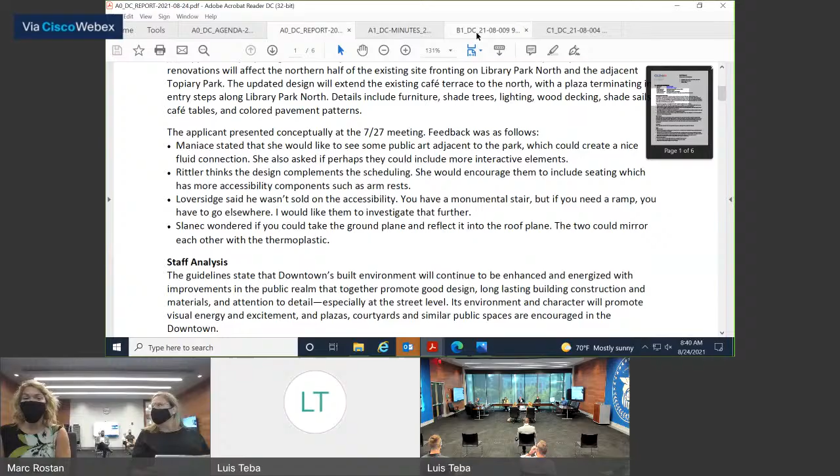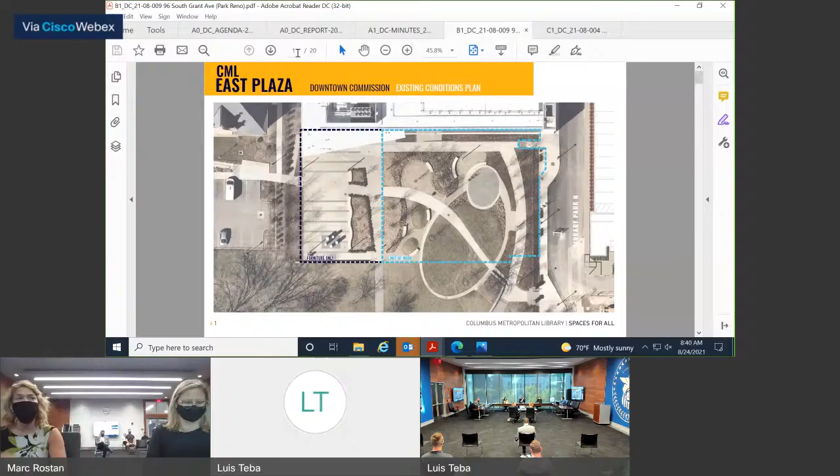Sure, certainly. So I don't think there's a significant difference to what we presented before. We did take a look at the feedback that we heard in the meeting and certainly tried to incorporate some of it, particularly around accessibility for children's elements and connection to the park. We've moved those a little bit closer to the edge of our space and into the park.

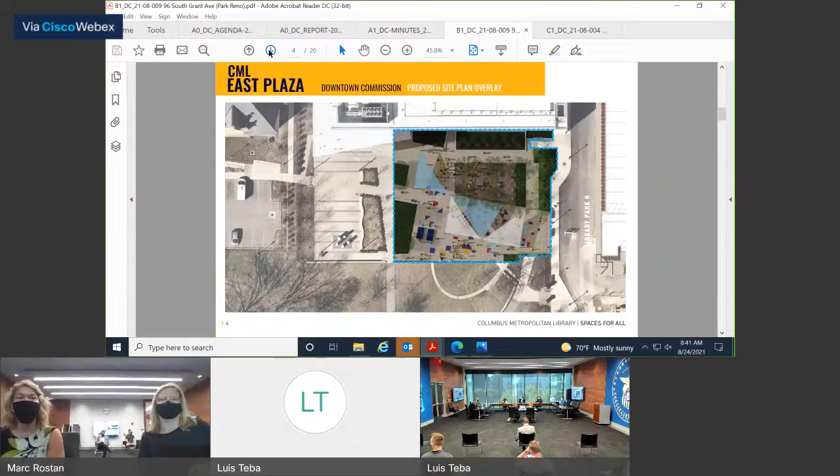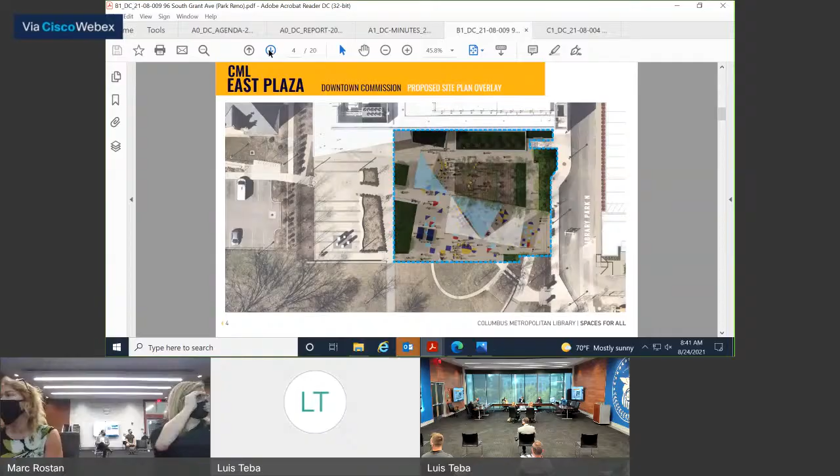We have finalized a little bit more what we anticipate to be the pattern and color pattern on the main plaza area, working with our team and the MKSK team to do that. We've continued to have conversations and really refined the color palette and some things along that line, and some of the positioning of the elements.

We did take a look at the feedback around accessibility, and we took another look at that, or two or three. We feel that the challenge for us around adding further ADA accessibility is really around the location of the trees and how we would be able to manage that, so we feel that is a very difficult thing for us to add.

It's in order to have the entry on the right, on the north entry as you're looking south, page right, by the stairs. On the east side of our site, we have less grade change than on the west side near the library. There's already a lot of settling issues along there because of the existing pump system involved, so in the basement we don't want to add more hardscape to the west side, but also it's like five stairs there.

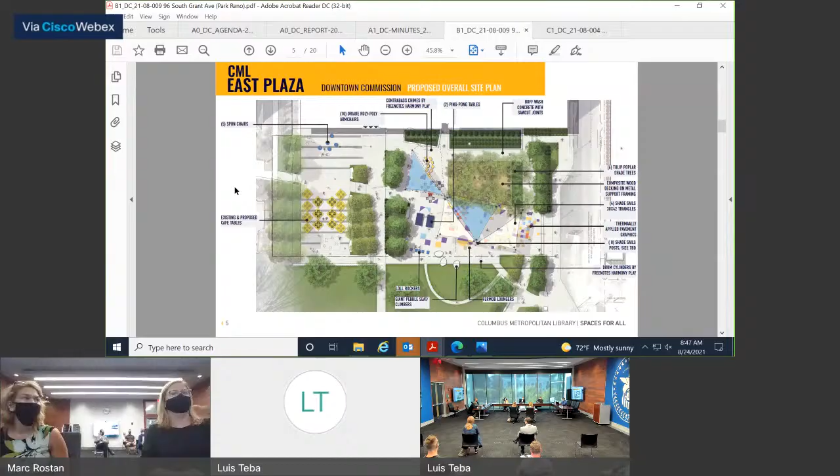The nice thing about it, though, is that we are looking at some various lighting opportunities and options below it, so that will be something that could also change, which I think will be unique to the space. When the shade sails come down, the posts will remain, and that lighting would also then be directed in a different way so that it's more ornamental and not shining at nothing.

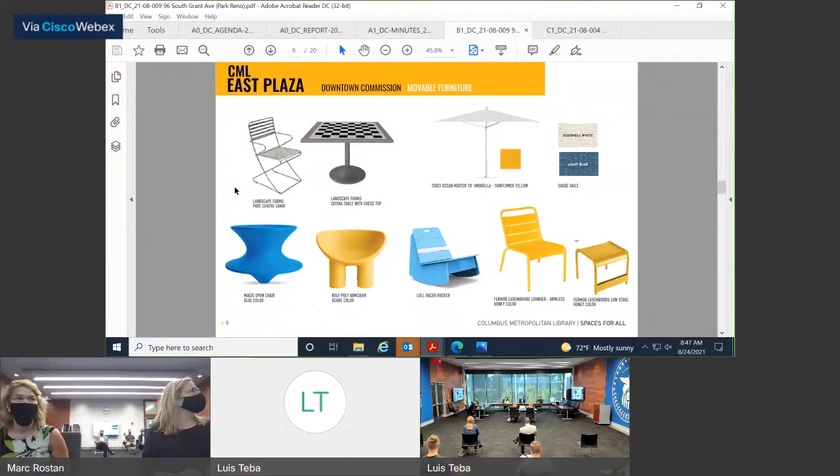That's right, yeah. Any other questions for the applicant?

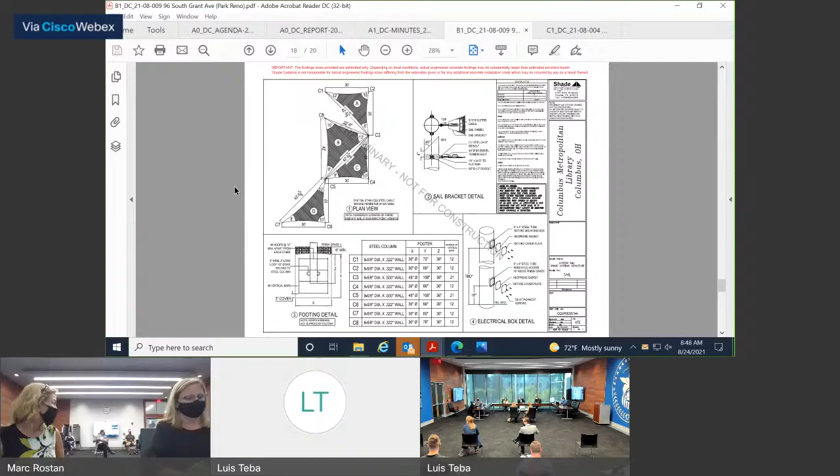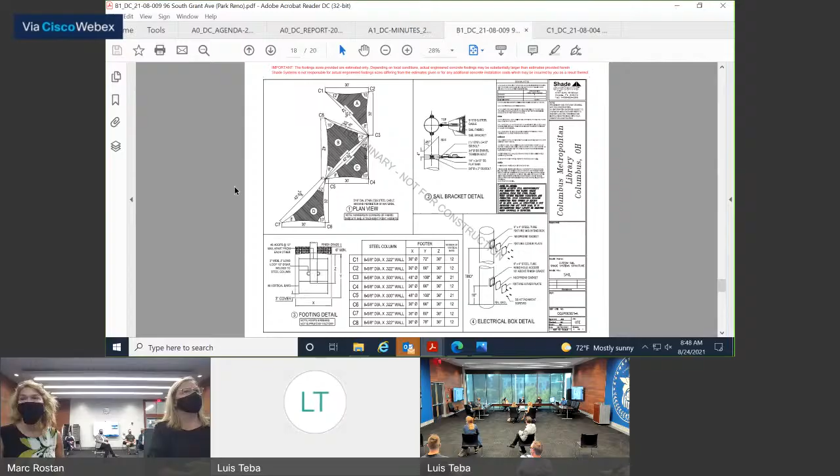The parking - I'm just two doors down, we've been down there for third generation, been down there for 75 years. There's a couple of concerns I have. One is the parking; from the schematic I saw, there are approximately 45 parking spaces, would that be correct? I think that's a different project. We're talking about the library, not the parking on each side. Okay, you're going to talk about one of the others - let's maybe hold that for later. Are there any other comments?

You guys don't have to talk about that. Oh no, I was gonna say, you're not doing anything with parking. We have a drop off. I'm not hearing any other comments.

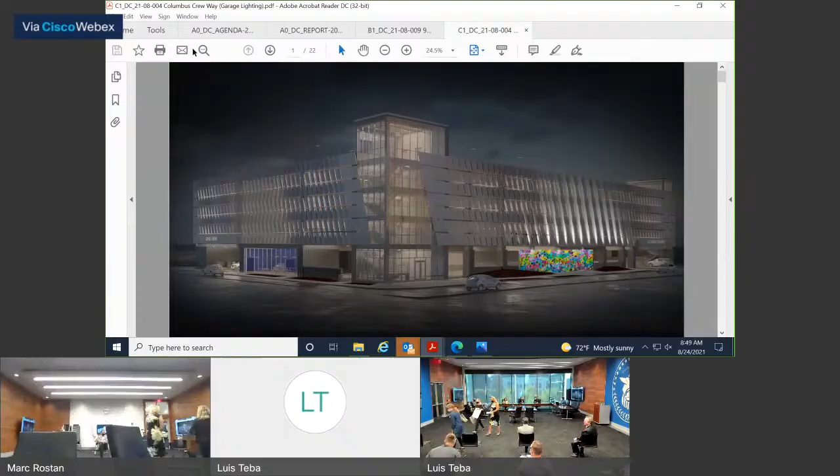Condition with exterior lighting package from Astor Park parking garage. It was approved at the May downtown commission with a condition that they return with lighting. The proposal calls for 20 upward facing arm-mounted luminaries along the east elevation to illuminate the architectural perforated fins. The mural will be illuminated by 9 downward facing arm-mounted luminaries. The Columbus Crew Way entrance sign and Cahill Drive entrance sign will be illuminated by slim profile LED luminaires. The rooftop parking will be illuminated by pole lighting.

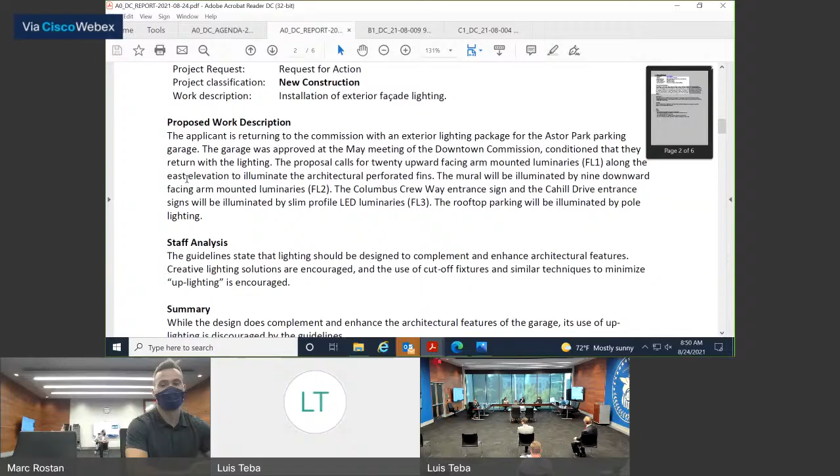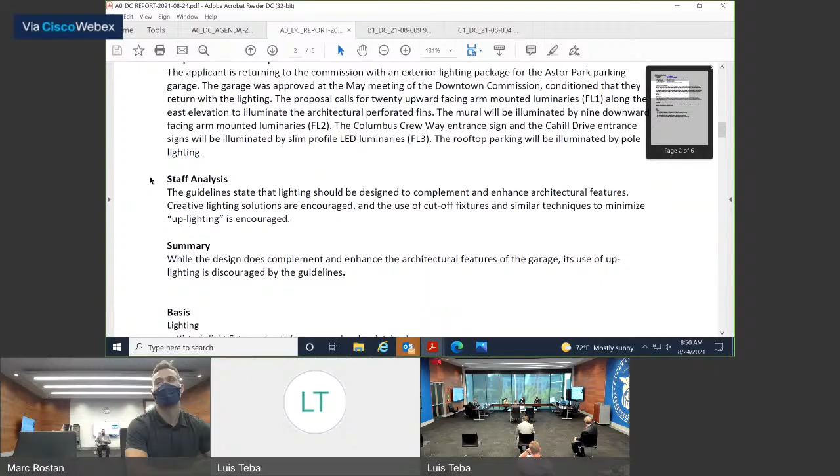The guidelines state that lighting should be designed to complement and enhance architectural features. Creative lighting solutions are encouraged, and the use of cutoff fixtures and similar techniques to minimize uplighting is encouraged. So in summary, while the design does complement and enhance the architectural features of the garage, its use of uplighting is discouraged by the guidelines.

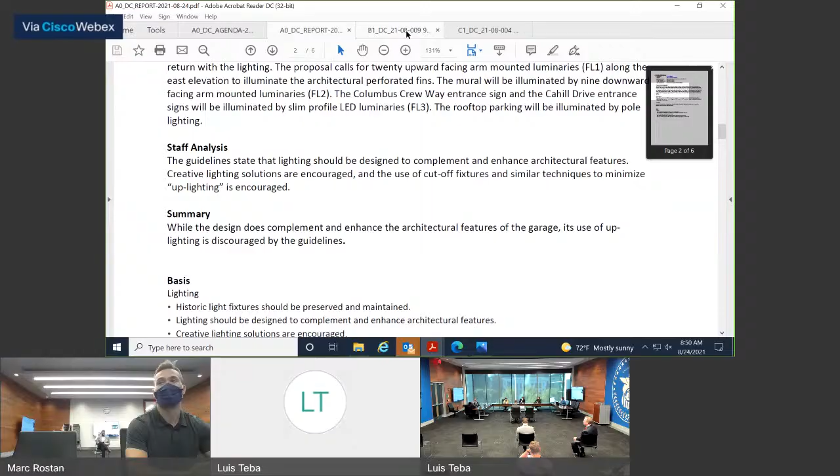Let's see, I'm sorry, were you sworn in? Yes. Would you identify yourself? Zach McClurg, the project architect with Moody Nolan. Zachary McClurg with Moody Nolan, the project architect.

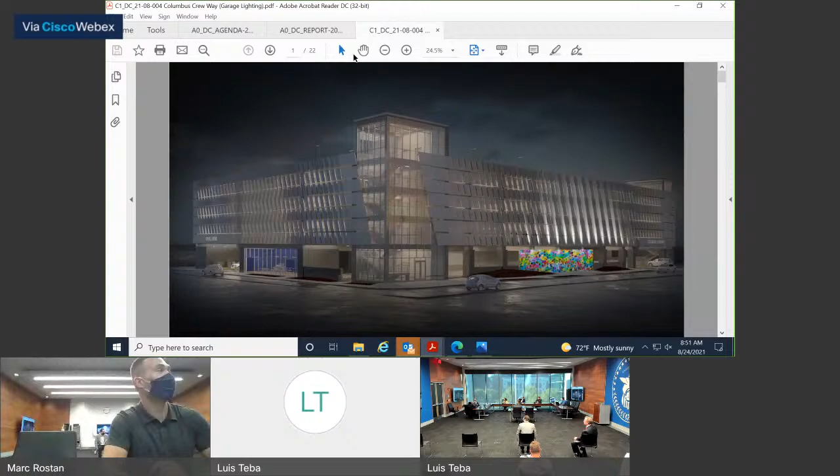Okay, do you want to show us what you're thinking about here? Sure. So we did engage a lighting designer, and one thing we kept in mind was the distance of the throw of the light. We plan on that light being at its weakest towards the top of the wall, the top of the 5th floor. We don't anticipate any light pollution beyond the facade itself. It's mostly there to highlight the perforated metal panels.

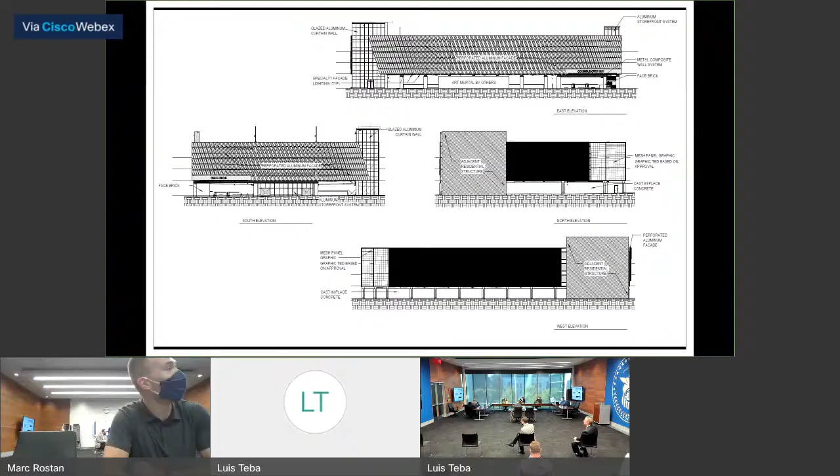Those lights, kind of pictured it, so they're fine. Correct, yeah, they're angled towards the building and up. They should follow up along our metal fins that we have there. Are they mounted on the bottom of the metal fins or on the ground? They're mounted on their own attachment arms along the 2nd floor of the parking deck. I'm not sure if that's shown very well in any of these. Looks like you can maybe see it - just over the metal panel, so it doesn't start down on the ground. Correct, yeah.

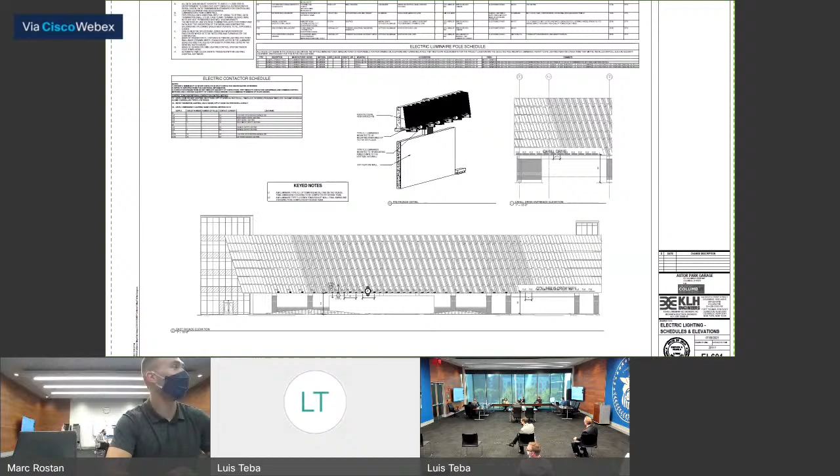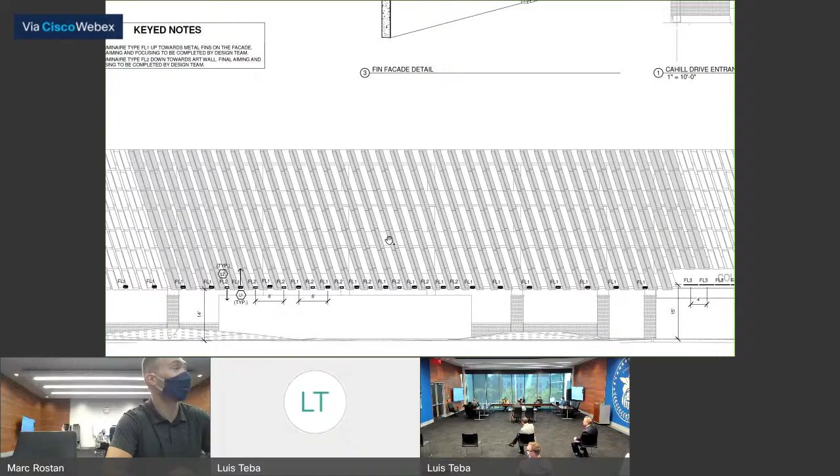Correct, it's the same. Yes, correct, it's the same assembly. It comes off its own rigger arm that's angled down towards the mural itself. Yes.

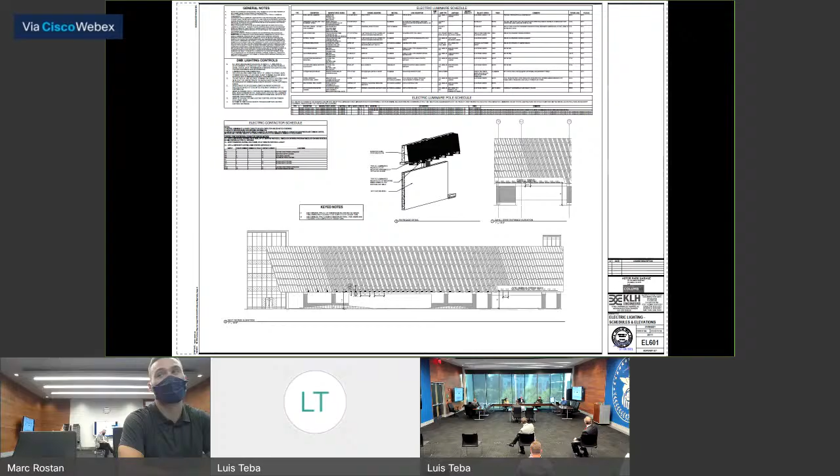Let's just, tell me, what's our objection to the uplighting, so they shoot way up there? As opposed to something that was directed at the wall. You mean, trying to advocate if it's lighting? Sure, yeah, I mean, I wasn't around when the guidelines were created, so I don't know what the exact intention was, but my guess would be light pollution. Yeah, sky glow, we got it all outside.

Is it supposed to be bright, or is it kind of something subtle? It's probably not going to be too bright, honestly. We didn't want to compete with the stadium across the street, especially working with Pizzuti and Haslam. I'm sorry, are they color changing? No, they're not, they're white the whole time. I frankly like that.

For a second, okay. So again, to rehash this, the building has been approved, they were asked to come back for lighting, so we're simply addressing lighting. Any questions or comments on this, anything else, anything from the audience?

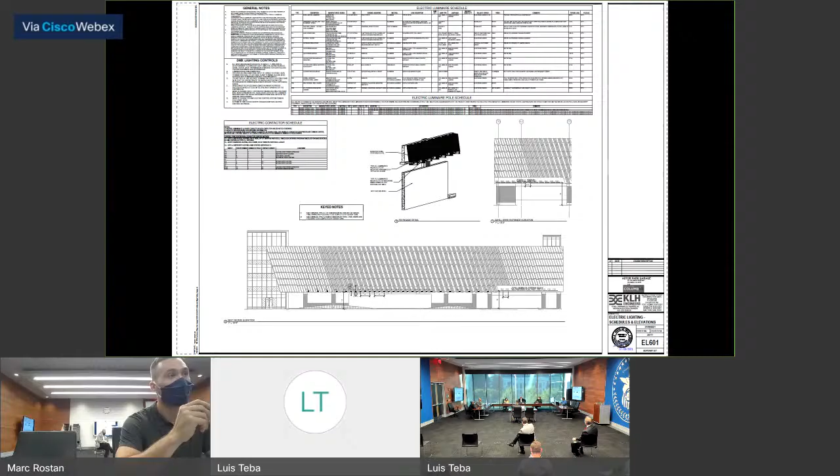Yes, go ahead, Jan. So other than what you're doing on the east facade, is there anything down for the other facades? There's nothing else directly illuminating the facade on any faces other than the one you see along Columbus Crew Way.

Okay, and just a real quick question, is the lighting on the mural, the art component, new today, or was that part of the original? No, that's also being asked for approval, but that was not part of the original.

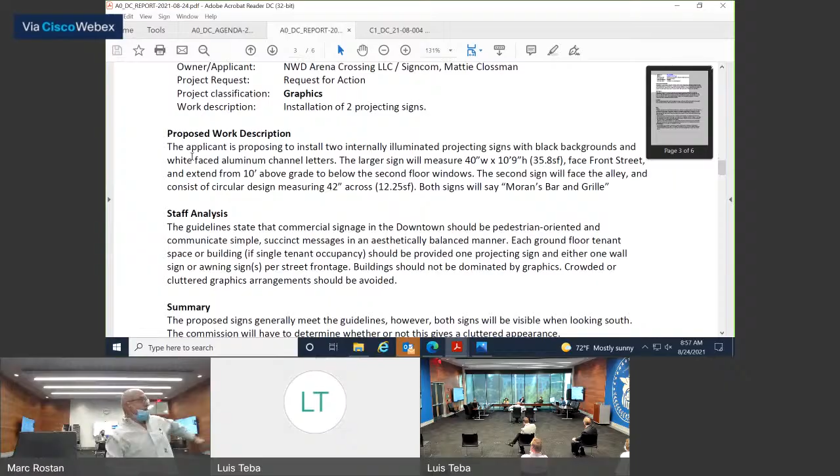Guidelines say that commercial signage should be pedestrian oriented and communicate simple, succinct messages in an aesthetically balanced manner. Each ground floor tenant space should be provided one projecting sign or one wall sign, and either one wall sign or awning per street frontage. Building should not be dominated by graphics, and crowded and cluttered graphic arrangements.

Summary, proposed signs generally meet the guidelines. However, both signs will be visible when looking south. Commission will have to determine whether or not this gives a cluttered appearance.

You mean when looking north? Looking south, when you're looking south from the north, you'll see right here, this.

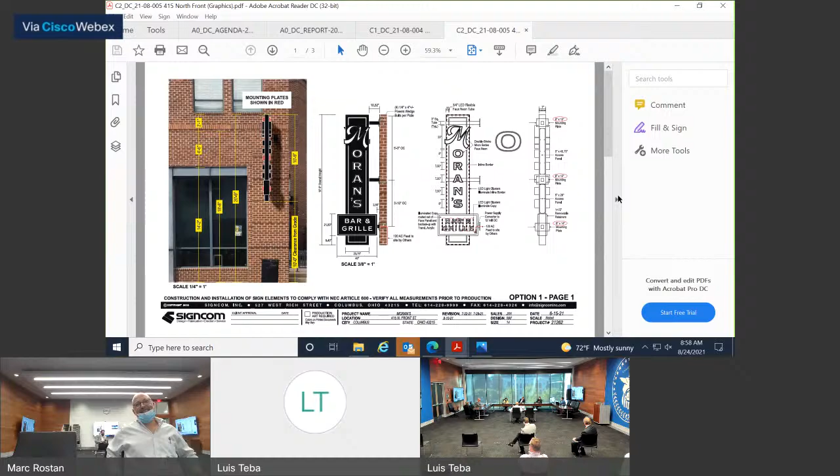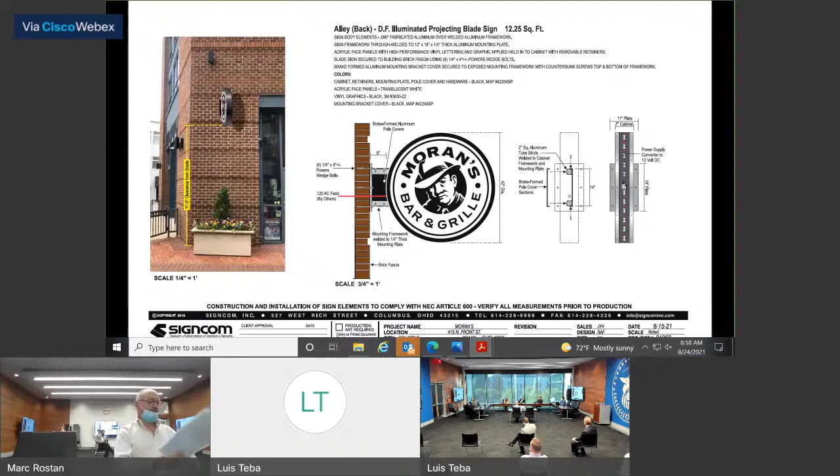I'm sorry, we have the applicant here. Would you identify yourself? Bruce Sommerfeld, thank you. Bruce? Okay. Were you sworn in? Yes, did you have any comment?

No, it's a visually challenged approach from the south. We're heading to the south and certainly one is more pedestrian oriented than the other for vehicular traffic, but we appreciate your awareness and appreciate the move forward.

No, it's not neon, that red just identifies the LEDs on the inside of the cabinet. It's all black and white. Oh, what's from the very outside? Oh, those just show the brackets, the studs or the plates, side going left to the right.

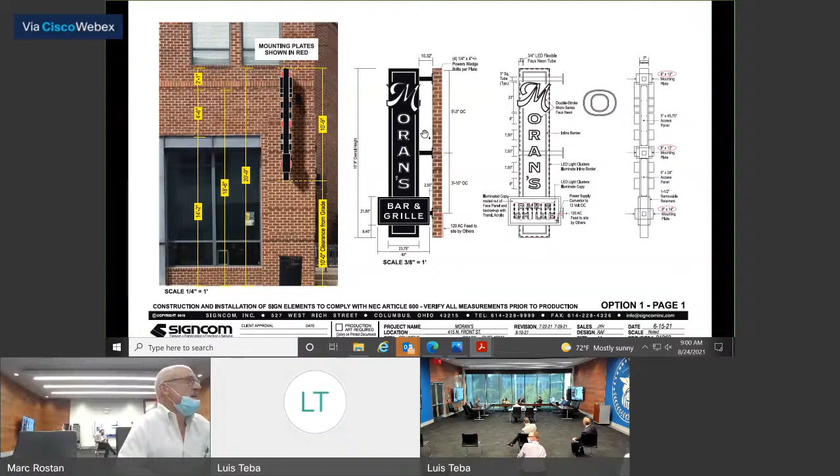Motion to approve, is there a second? Questions, anything from the audience? Those in favor say aye. Aye. Those opposed? Motion carries. Thanks, Bruce. Thank you. Good to see you. Good to see you.

Our conceptual review, by Neilston. Here we are, 225 Neilston.

So here's the building, looking south, this is the east side of the building. This is like an alley, it's not a city-owned alley, it's just like an access road, owned by the property owners, I believe, they want to turn into kind of like an outdoor patio space.

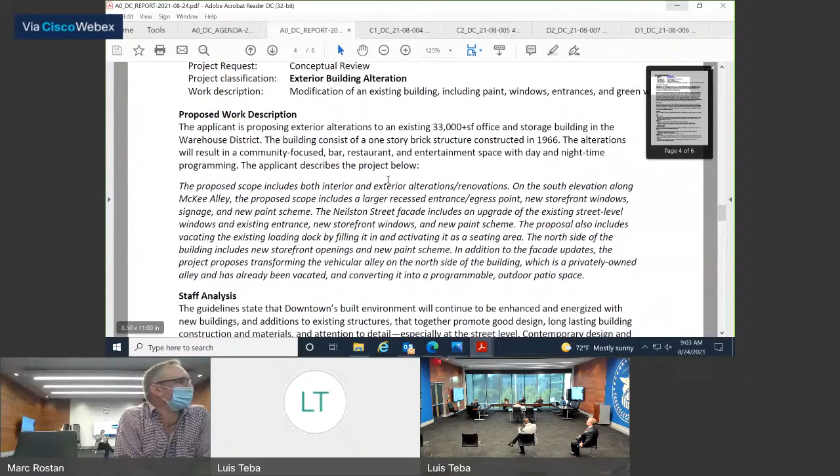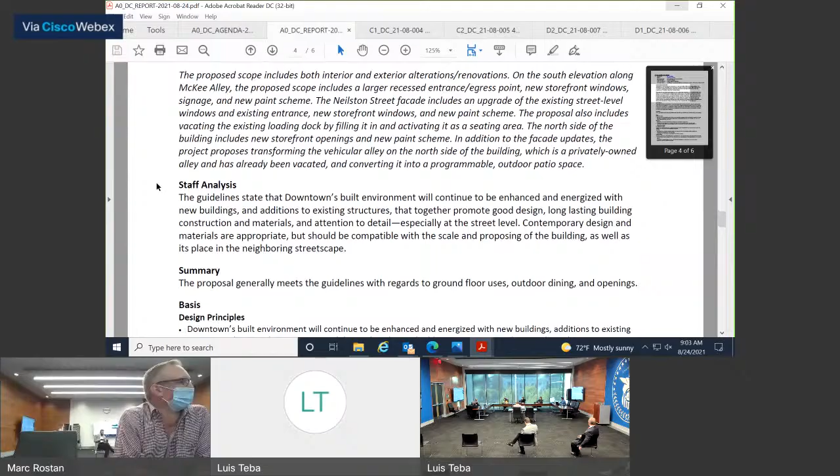So our analysis is that the built environment will continue to be enhanced and energized with new buildings, and additions to existing structures that promote good design, long-lasting construction materials, and attention to detail, especially at the street level. Contemporary design and materials are appropriate, which should be compatible with the scale and proportion of the building, as well as its place in the neighboring streetscape. Summary, the proposal generally meets the guidelines with regards to ground floor use.

You identify yourself? I'm Brad Parrish with Archall Architects. Thank you for hearing me this morning.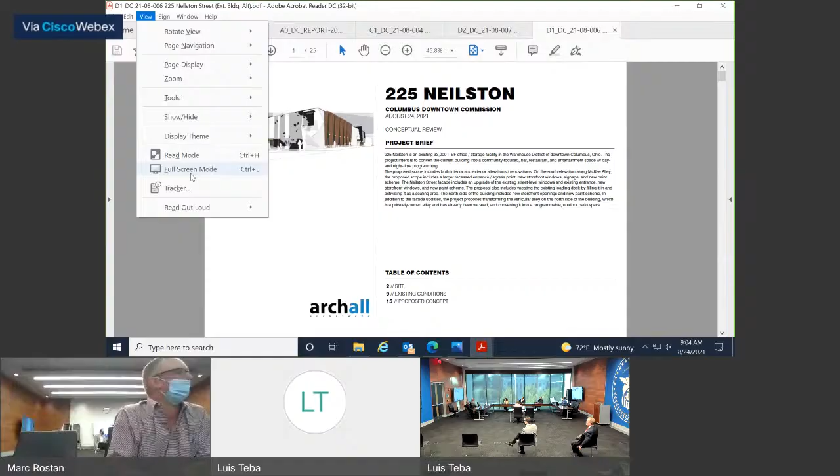This project is, the existing building is 33,000 square feet. It's the old vital statistics building in this area, so it just holds a bunch of the birth and death records of individuals in Franklin County. So they're moving out. My clients, Adam Nestler and Noah Morgenstern, who are from Buffalo and Boston, and they've had a couple concepts for this community-based bar and restaurant and entertainment space, and so they want to bring that to Columbus.

From the design on the exterior of the building, when we first started looking at this, the existing building's a brick box, surrounded by really articulate warehouse type brick buildings with great brick detailing. So we felt that the existing brick is not a really great brick, it's kind of an orangey color on the outside. So we felt that if we would paint the existing building to set it off amongst the really great brick detail warehouse buildings in this area.

But also kind of, from a design standpoint along Neilston here, is give sort of these big long frames that start to play off some of the existing storefront openings, reuse the existing entrance there, and give it some height that signals it's sort of coming into an entertainment space. We're adding an additional entrance space off of a key alley here as well. The signage element on the corner, we're still developing.

And I would say hold off on comments today on that as we'll bring that back to you. But it's some sort of amorphic shape on the corner of the building here, along with the brand signage, which they're still sort of gathering.

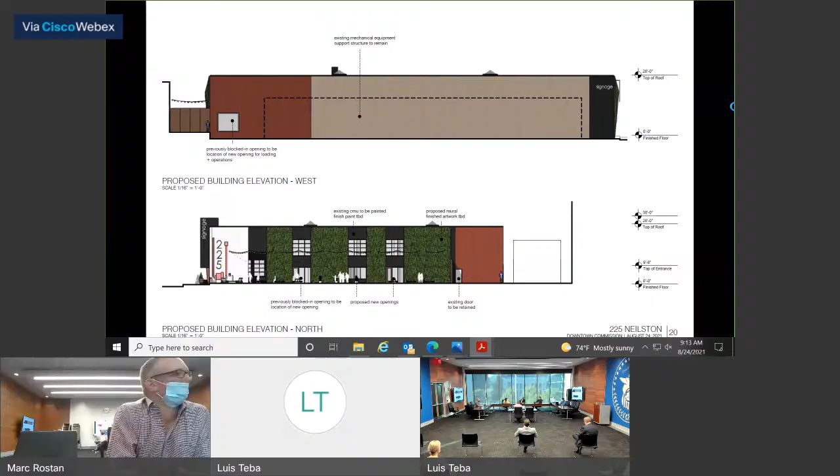How wide is the alley along the south side? I mean, yeah, we're right on the property line with that alley. There is an entry, but it's recessed into the building — we're carving like a 10 by 10 space into the building so you're not swinging out into the right of way.

Yeah, you're exactly right. I appreciate what Bob said, and I agree with what Bob said, but it's sort of a prioritization on the public side of your building. I love some of the things you're trying to do — that red brick character, but still creating these punches of things along there. I love the alley, I think it's a great opportunity. The whole district needs energy, so yeah, I think it's a cool use.

I'd say the Neilston Street elevation has an organization too, and the north and south sides don't have consistency with those. So I don't want to put a lot of effort into the south side if the site is going to block whatever's going to happen there. I just want to be mindful of that moving forward.

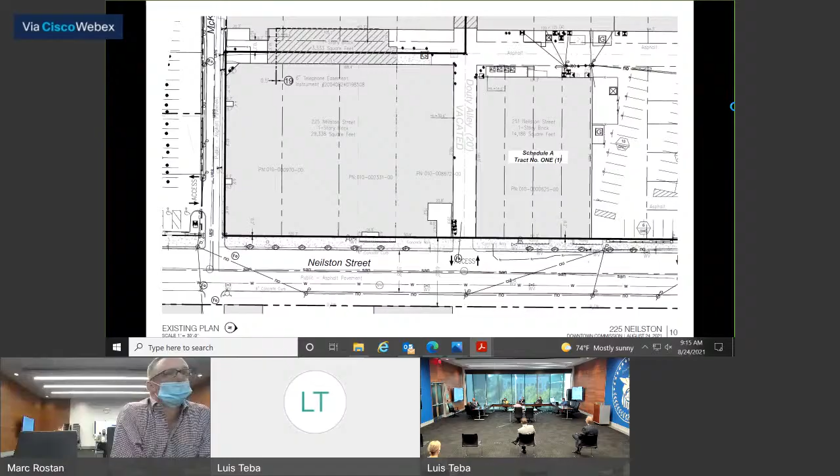Yeah, so there's a grade change from inside and out.

From our concept, it's something compressive, and then you open up to a two-story space too — it's kind of this nightclub feeling where you come into a small door and then open up to the larger space. And then we have the large windows there to the right of that.

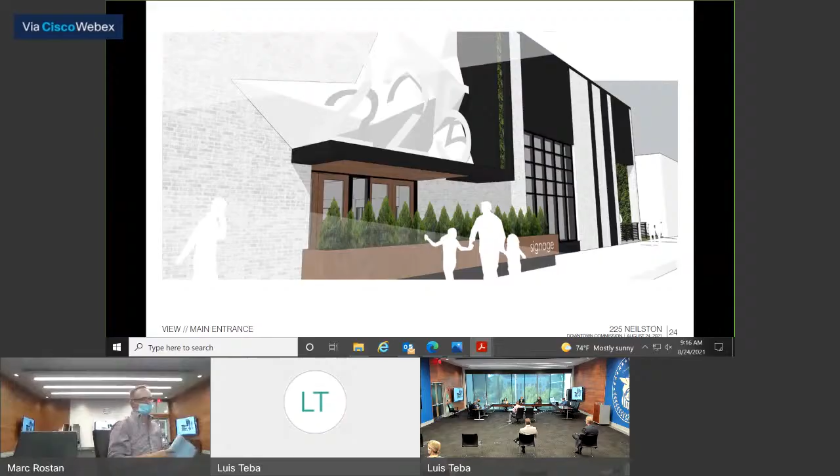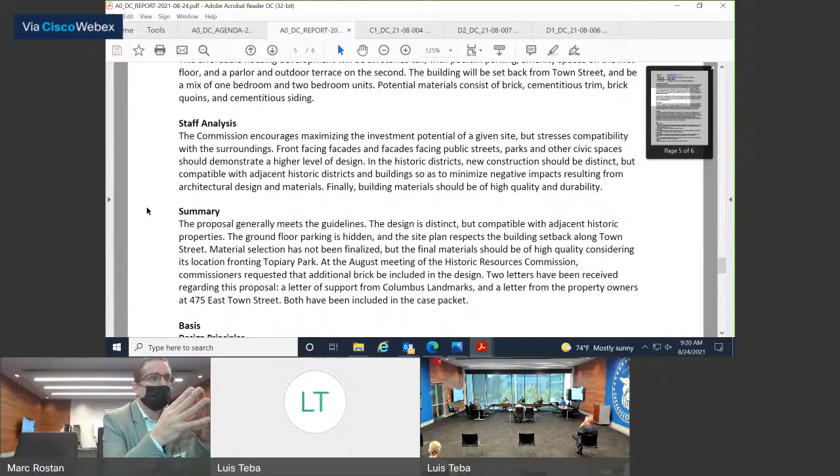In our analysis, the commission encourages maximizing the investment potential of a given site, but stresses compatibility with the surroundings. Front-facing facades and facades facing public streets, parks, and other civic spaces should demonstrate a higher level of design. In historic districts, new construction should be distinct but compatible with historic buildings, so as not to cause negative impacts resulting from architectural design and material. Finally, building materials should be of high quality.

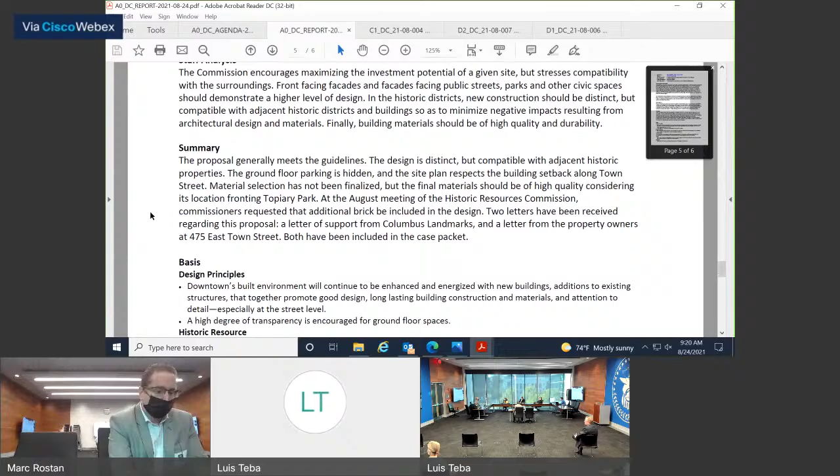Summary: the proposal generally meets the guidelines. The design is distinct but compatible with the property. Ground floor parking is hidden, and the site plan respects the setback along the front. Material selection has not been finalized; final materials should be of high quality considering its location.

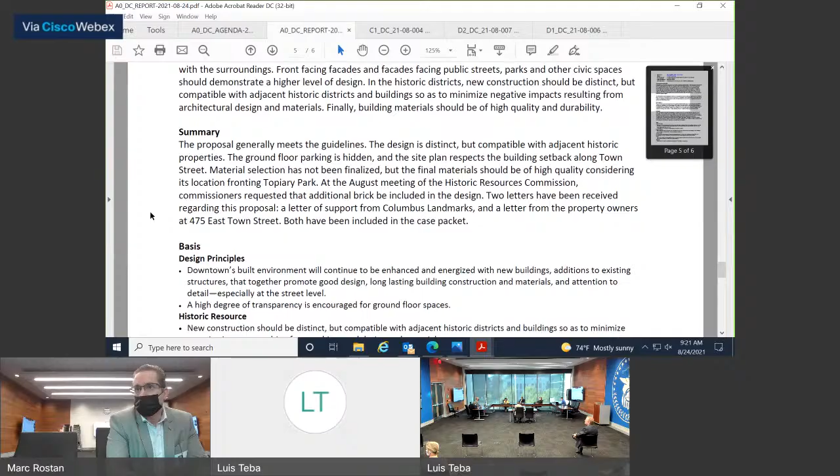At the August meeting of the Historic Resources Commission, additional brick was to be included in the design. At the last meeting, they didn't stress that as much, but they did ask about the south facade and parking.

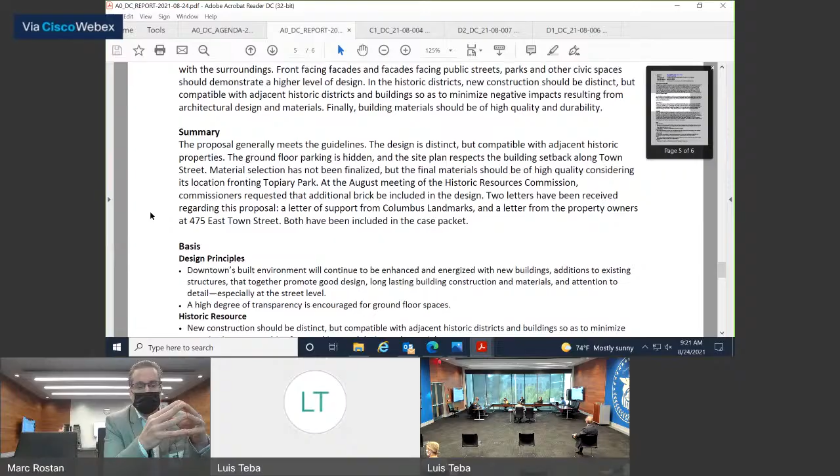Two letters have been received regarding this proposal: a letter of support from Columbus Landmarks, and a letter from the property owners at 475 East Town Street. Both were included.

David, did you have a presentation? Not specifically, I think. If anything, from the packet that you received, we were looking at the siding colors. There was a concern that it looked yellow, and it did look yellow. We're not intending the siding to be yellow—it's going to be a taupe color, more to match a brick tone.

David, would you identify yourself? Yes, excuse me. David Maleka, Moody Nolan Architects.

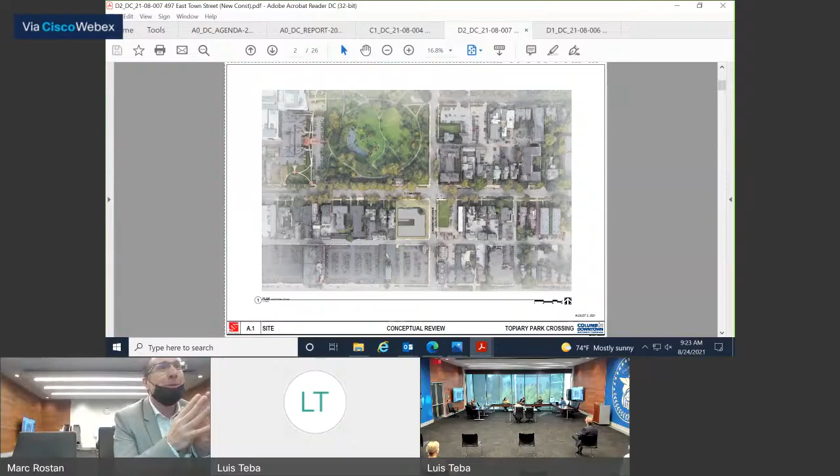So what is the material? The material above will be siding—there's actually going to be two types. The middle portion of the building will be one, and the upper portion another. We're looking at some sort of scalloped or shaped cementitious product that does that, but the problem is they're not shipping to the north for some reason. They would manufacture it down south, but it's a work in progress right now, so we'll have that selected for the next meeting.

Yeah. This one that's...

In the neighborhood, we did a lot of work up and down the street. There was probably a public presentation put out early on for this site that we went and regrouped on—we walked the neighborhood, and there's a lot of Queen Anne type architecture in that area. The challenge came back from me, actually from the client, saying we'd rather go in this direction—something asymmetrical, with siding, which he thought was more appropriate and softer. So we looked at Queen Anne detailing throughout the Ohio region and pulled references from that. What you typically see in Queen Anne is asymmetrical design, a larger front gable, columns and bay balconies, a one-story porch that wraps around part of the building, and sometimes turrets that signify a corner. That's where I pulled the references from, and I added those to the package as well.

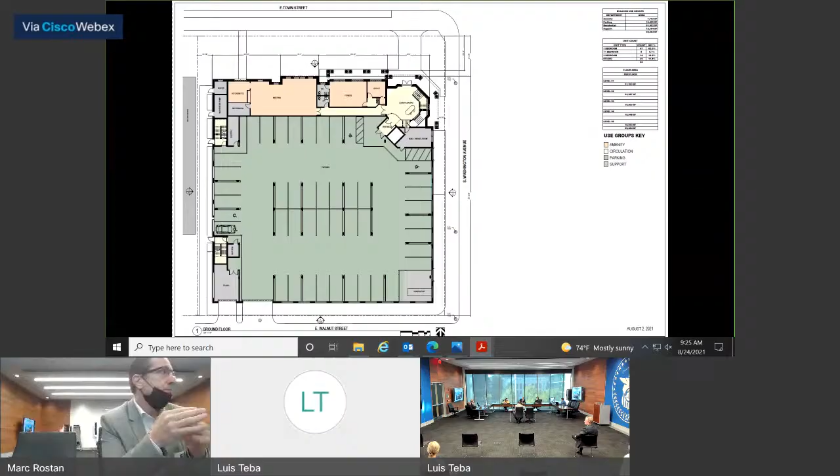Do you want me to walk through the plans and everything too? Sure. Yeah, there was a video—we'll put that up. Do you want to do the video first? Sure.

We are doing an affordable housing project, and one of the challenges from the client was to make sure it didn't look affordable, that it felt like it belonged in the neighborhood like any other market rate housing project. So there's been a balance between that and the cost involved. The resolution was to do a brick base, up the turret, and cementitious siding for the rest. All the moldings will be of that material or some non-wood material.

With the next presentation, we'll have all the materials included. I do think that when you do a project like this, trying to mimic something, the materials are very important. Otherwise it just doesn't come off. So it's between the materials and the detail that keeps the cost down. That's nice.

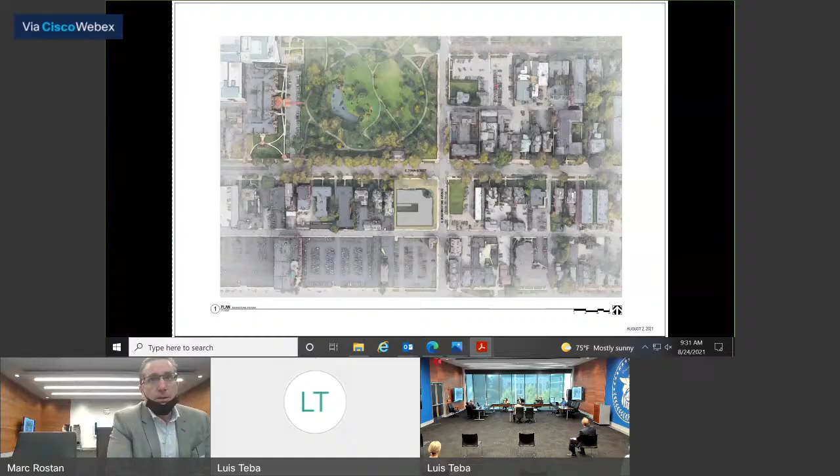We are 10 feet off the property line on the right side, 10 feet 1 inch or so. We looked at that and did a U shape of the building facing that way, so there's a large opening in the middle - that atrium space tries to offset some of the building impact along that edge. That side of the unit doesn't really have much along it - it's multiple volume space and no rooms look out onto it, plus there's a large garage in the back that's kind of a dumb face on it. We figured we did the best we could as far as accommodating.

We're also fighting on the east side of our building - there's overhead power lines, so we have to stay not only off the property line, we've got to stay away from those power lines. So it's been a balancing act of how much can we fit on this site and hit all of our setbacks and requirements, that's on the east side.

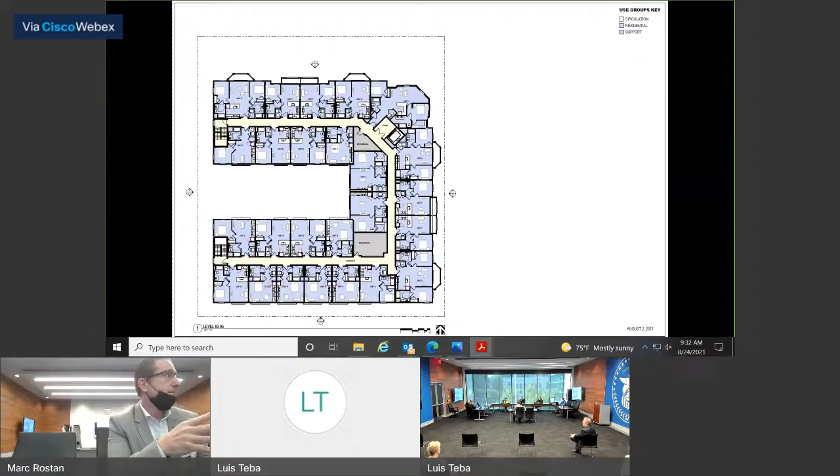Yes, so I worked on actually redesigning it yesterday, and we're also looking at enhancing it based on the HRC's comments. We looked at putting more emphasis on the south side as well. So for the next meeting, you'll see those incorporated.

But we are looking into those, and we will be blowing up how each one of those openings into that garage are working. There definitely will be a fence of some sort in there, but we are going to put a hierarchy to it so it feels more like a divided opening.

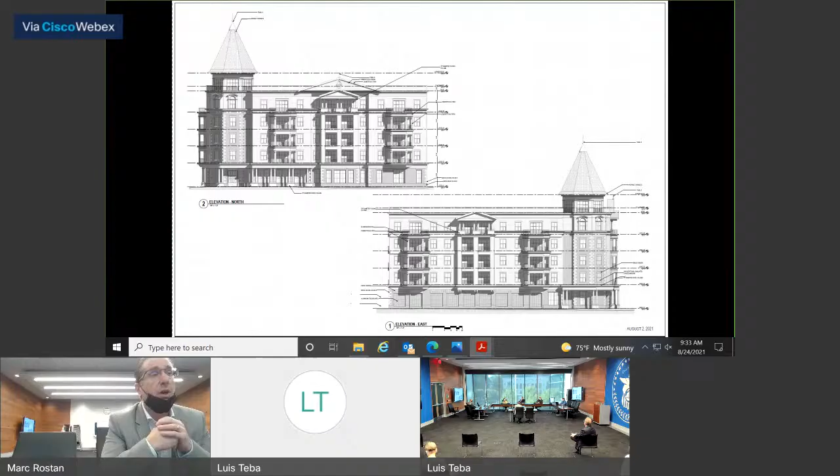Plus, the landscape is not showing. No, it's actually in the openings of the wall. Since it's going to be an open air parking garage, that's going to be the security end of that. The other thing you're not seeing here is there's going to be an overlay of landscape, which we are not showing as of yet, but will be obviously in the next package.

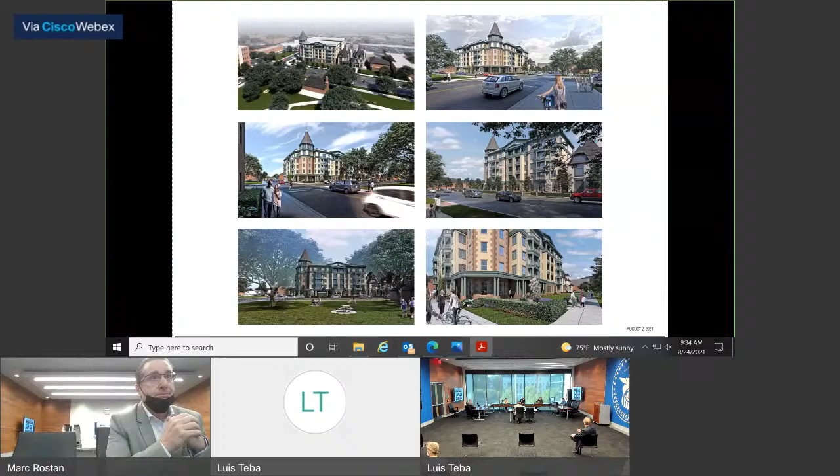I think it's great that we're getting something on that corner, we agreed to demolition without a replacement plan. Yeah, people, that was something. But it's been taken care of. Yeah.

Okay, good. Anything from the audience now? Matthew? And you have been sworn in, that's correct.

Go ahead. So about 45 parking spaces. 50 parking spaces. We're Townley Court Apartments at 580 East.

My big concern there is the amount of cars that are going to be out on the street. In other words, we have a topiary garden that's listed with the Smithsonian as one of the top 10 small gardens, and my father was instrumental in bringing that topiary garden to pass. And visitors coming into the area right now, in the evening, parking is very tight right now.

So, if you've got another 120 people in that apartment building -- right now, Townley Court, we have 104 units there, and there's 85 cars to that apartment building. We're not high rent. By the way, also, when this says affordable, this is affordable housing, can you define that for me?

It just meets the criteria of the affordable housing. I don't know the numbers offhand for what they're meeting, but it's whatever that city criteria is for. So is it Section 8? No, it's not Section 8, because there's going to be a mix of some market rate in here as well.

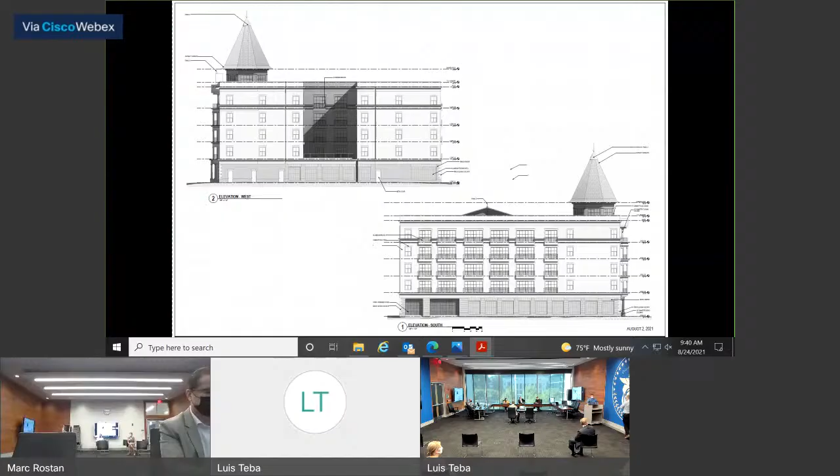Jeffrey Deppert and my wife, Catherine Deppert, were the owners of 475, which is the sister house to the house that's immediately adjacent to the property. So we're the ones that submitted the letter.

So three quick points. We wanted to express our general support for this project. We're very excited about it. We're hoping it continues to be a catalyst for the development of the properties just to the south, which Luis mentioned in his overview and summary. We think the team has done a really admirable job with this initial design concept, so we're very excited about that.

The Historic Resources Commission made a comment about the south side facing of the building. We agree with that. It's a very walkable community. There are people walking up and down Walnut Street, which is immediately south of the property, and Ridge Street. So that side of our property is very visible, so we think that's great. We appreciate what the team has done there.

As we mentioned in our letter, we wanted to acknowledge that not only is this a historic district for the city, but this is in the National Register of Historic Places. These properties have a lot of culturally, artistically, and historically important components. So we wanted to advocate for best practices in construction to make sure those adjacent historical properties are protected. We've talked with the team and they've been very open and communicative about that. We're very grateful and appreciative.